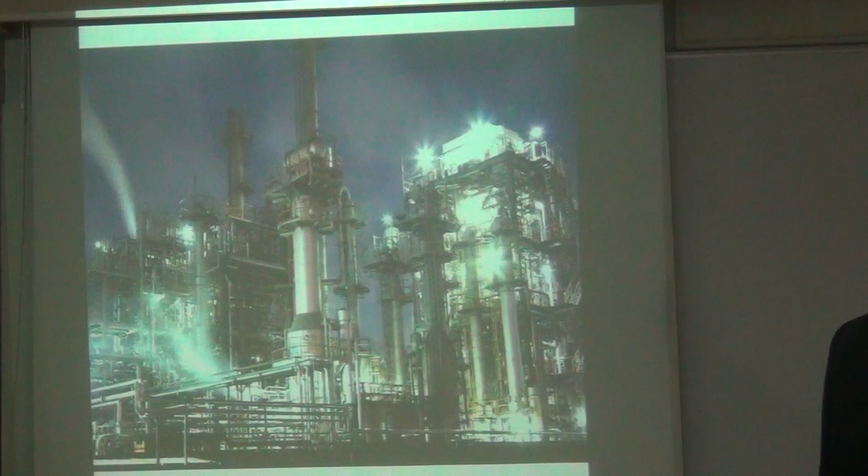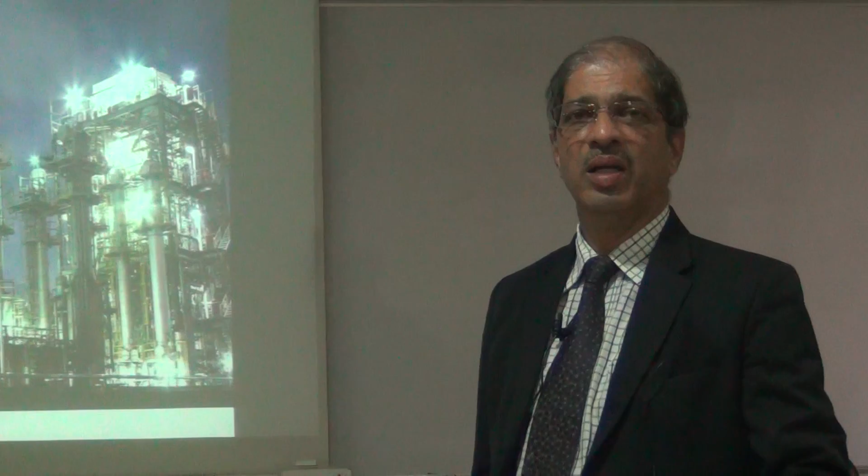API programs we are talking about. In the refinery, we have different equipments. We have pressure vessels where process is happening. We have piping where the fluid is going from one side to the other. And we have storage tanks where the product is stored. So we have pressure vessels, we have piping, and we have storage tanks, and these are constructed to different international codes.

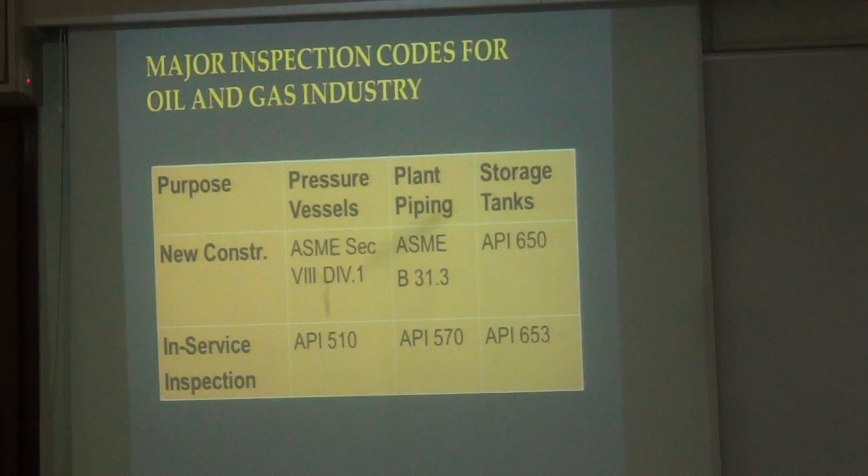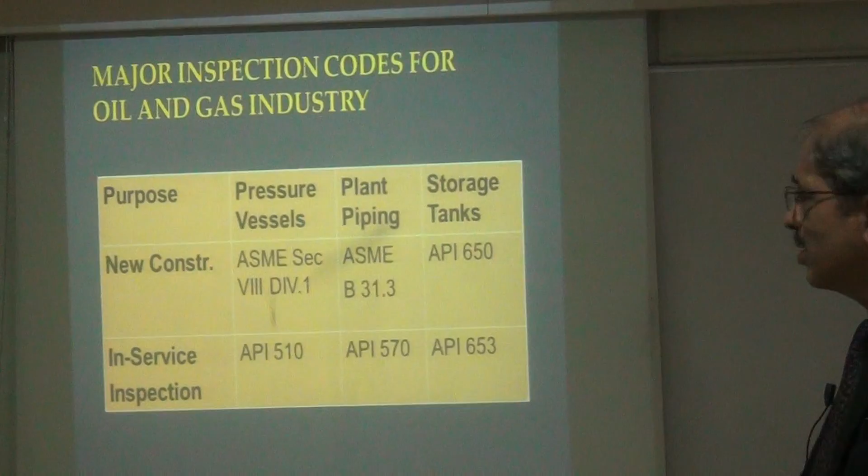Pressure vessels are manufactured as per ASME Section 8 Division 1, Section 8 Division 2 and so on. Pipings are manufactured as per B31.3, and tanks are manufactured as per API 650. So the new tank, new pressure vessel, new piping, we have different codes.

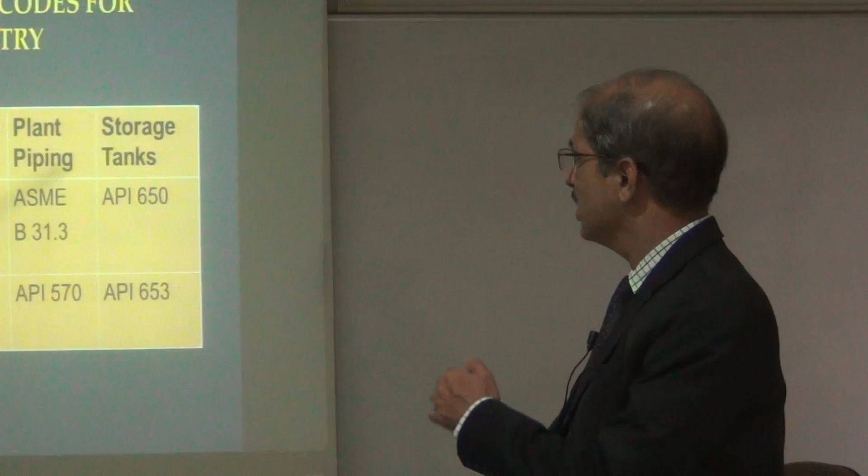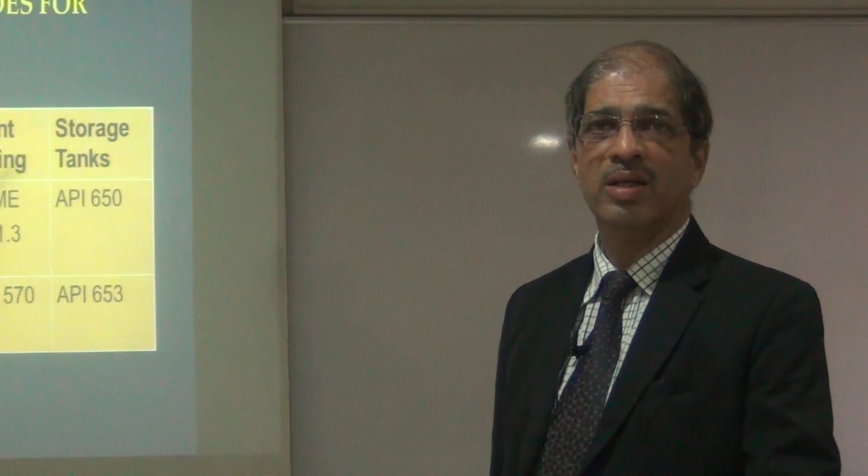These are called construction codes, and when these equipments are working for, let's say, 5 years, 10 years, 15 years after commissioning, we have to do in-service inspection of these items, and for in-service inspection we have different codes. For pressure vessel it is API 510, in-service inspection of pressure vessels. For piping it is API 570, that is in-service inspection of piping. And for the tanks, it is in-service inspection of tanks, that is API 653.

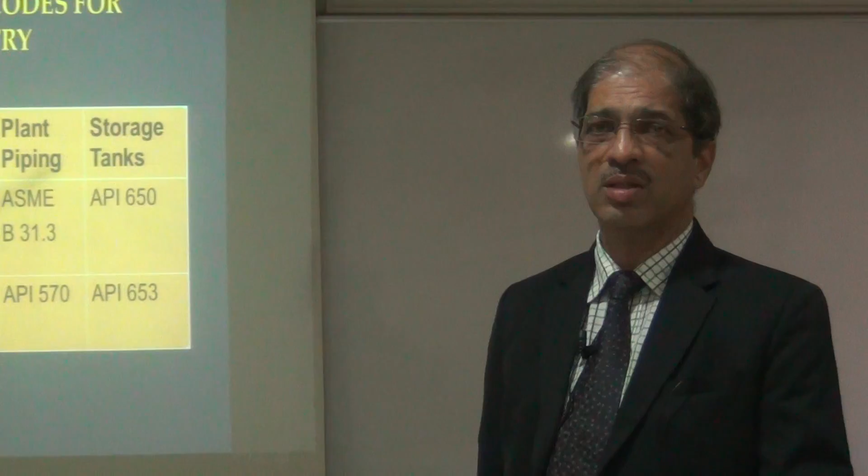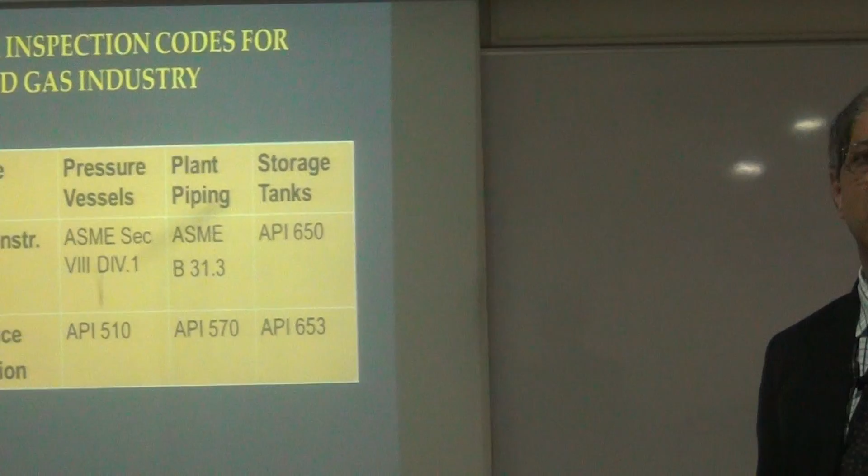So, new pressure vessel, the code is different. Old pressure vessel, the inspection code is different. And API is conducting examinations: API 510 pressure vessel in-service inspection, API 570 piping in-service inspection, and API 653 tank in-service inspection. These examinations are conducted by API.

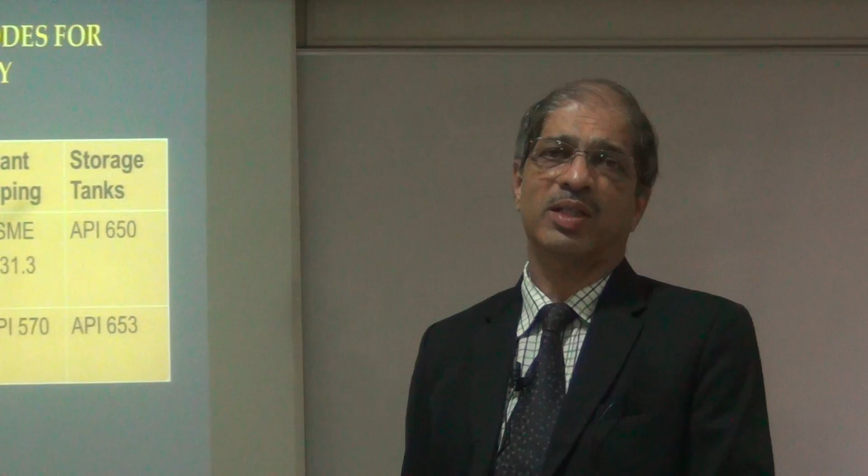Now, as an authorized piping inspector, or as an authorized in-service inspector for pressure vessels, or as an authorized inspector for tank, when you are entering into the tank, the first question comes in your mind: what was there at the beginning? Because the deterioration has happened over 10 years. So, if today's thickness is 20 mm, the question will come in your mind, what was the thickness at the beginning? And then, once you do this particular in-service inspection, you have to keep it in mind that the original construction code also you should be conversant with.

And that's why the inspector who is doing in-service inspection, after finishing the inspection, has to take 3 types of decisions. One is run, that is run the vessel. Second thing is repair, suppose there is a crack, suppose there is a corrosion, you have to remove it, you have to weld it, so that is repair. And third thing is replace, the equipment is so old and has deteriorated so much that we have to replace it. So run, repair, replace. These 3 are decisions you should be able to take.

But the approach in in-service inspection is totally different than new inspection. Let's say you buy a TV and it comes to your hall and you see a scratch on that TV, you will immediately telephone your supplier and say, I don't want this TV, I want a new TV, because you are purchasing a new TV and paying full amount for it. But suppose after 3 years there is a small scratch on that TV, and your daughter was cleaning and made a small scratch there.

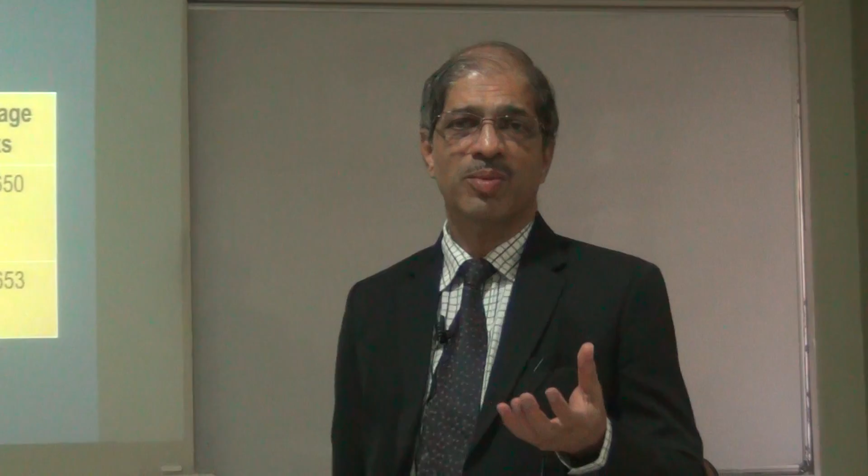Do you feel that you will immediately telephone the supplier and get a new TV? The answer is no. The reason is, I will think that with the present investment, can I use this TV for 2 more years? Because I have no big problem, I can see the pictures properly. Same thing happens in the refinery: when the equipment is old, I am thinking whether I can continue with this equipment for a few more years to get returns on my investment, but without sacrificing safety and quality requirements. And that is the approach in in-service inspection.

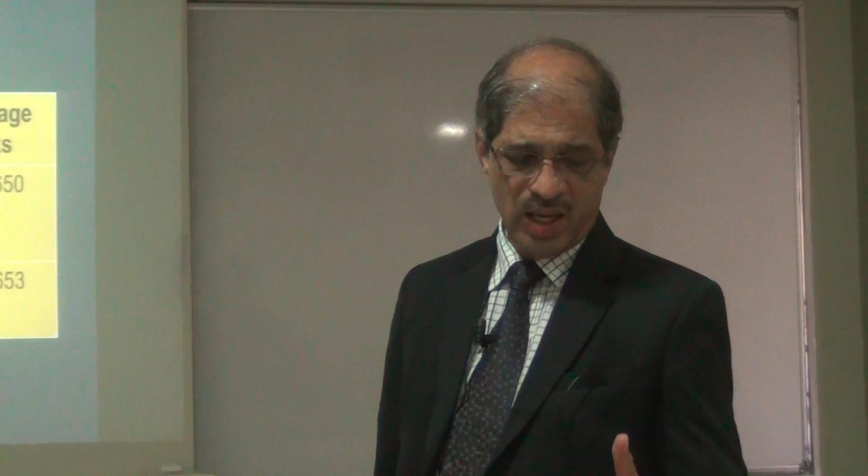So these programs for pressure vessel, piping and tank in-service inspector programs, they are going to equip you with knowledge and skill to find out what is the remaining life of these equipments. Thank you very much.